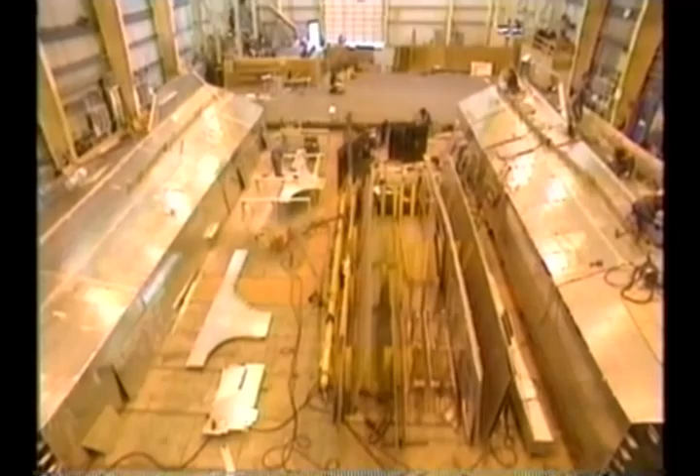This project is a very steep learning curve, but we expected that. The only way to gain experience is to do things, and we're fortunate that the government has allowed us this opportunity. We believe that we can go on from this and sell these things.

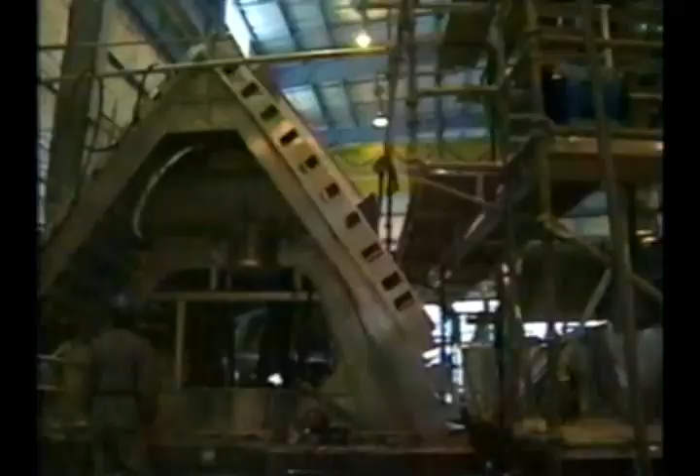As the months passed, management and crews moved over the hump of the learning curve. Like any multiple ship project, once you get the first ship under your belt, once you've banged your head and tripped over a few times, then the whole thing starts to run efficiently, and that's what we're seeing.

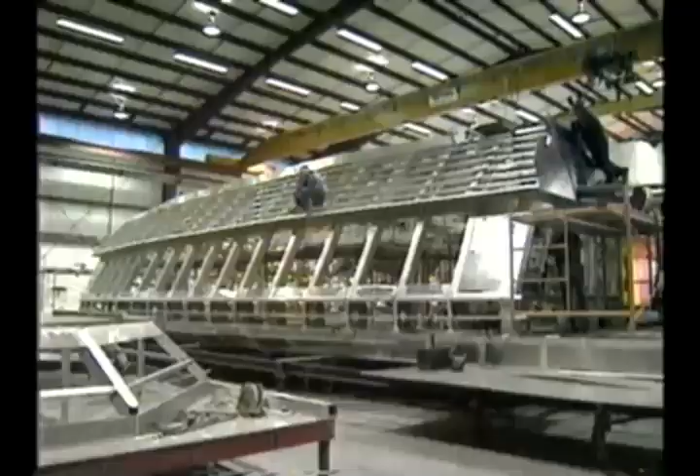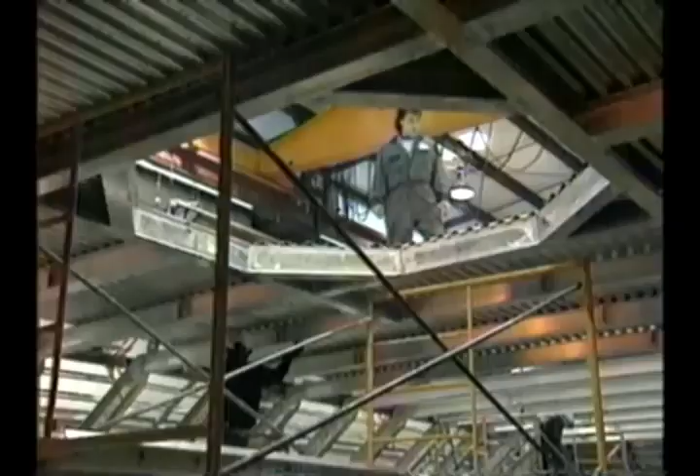Everyone involved began to get a sense of the potential this project could herald. At Point Hope Shipyard, the long term was starting to come into view. The learning curve has been better than we ever thought.

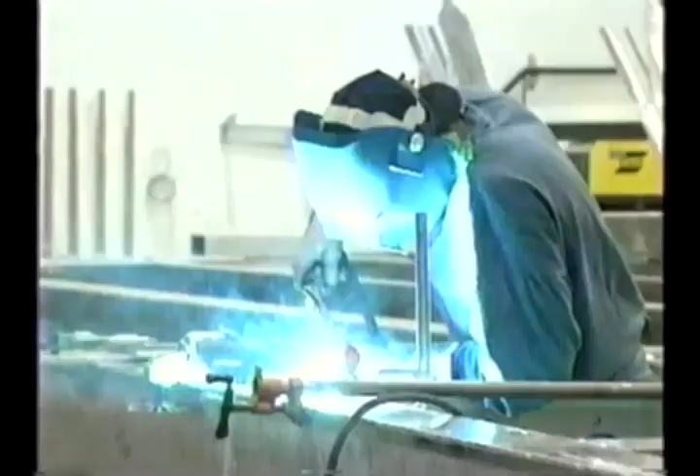The guys picked it up, I guess partly because they're seeing a future in shipbuilding now, which I don't think a lot of our workforce here has seen for some time. So I think with the great interest in it and seeing a future, they picked it up. The workforce seems to be genuinely interested, genuinely happy to come to work in the morning. Therefore, almost daily, the productivity is increasing. I see it as Point Hope's future.

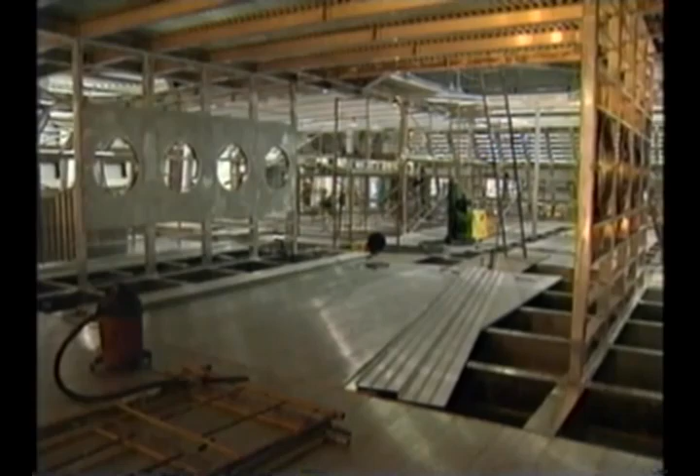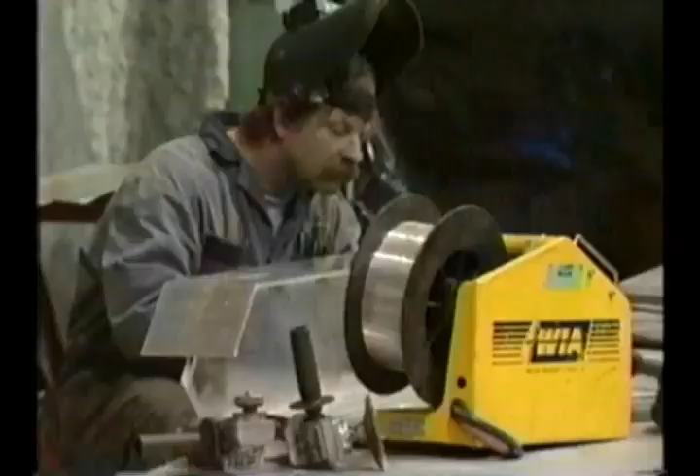Without this project, this company would not be here today. Fishermen are not getting their boats fixed, so there's been a slowdown. Even the Department of National Defence has had cutbacks, and they're not refitting their ships as often as they used to. At the moment, we're about 130, 130 all-year jobs. So the impact would be quite significant to the working base of Victoria.

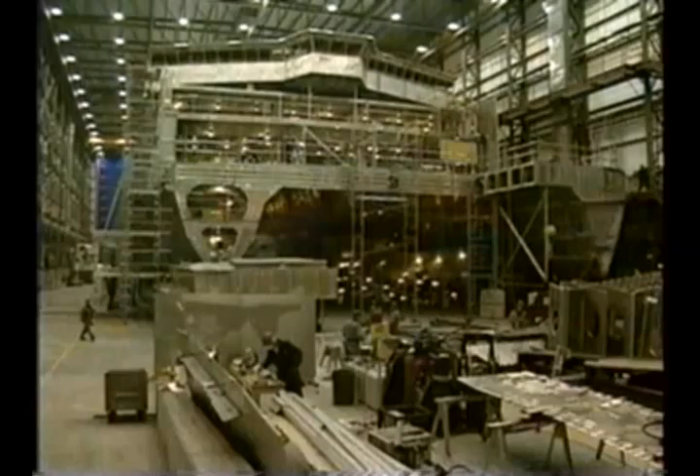At CFI, there is sober optimism, tempered by an acknowledgement that the project has had its detractors. It doesn't matter where you are in the world today, there's always someone telling you why you can't do it, and your ship will sink and you've made it out of the wrong material. But we all get past that.

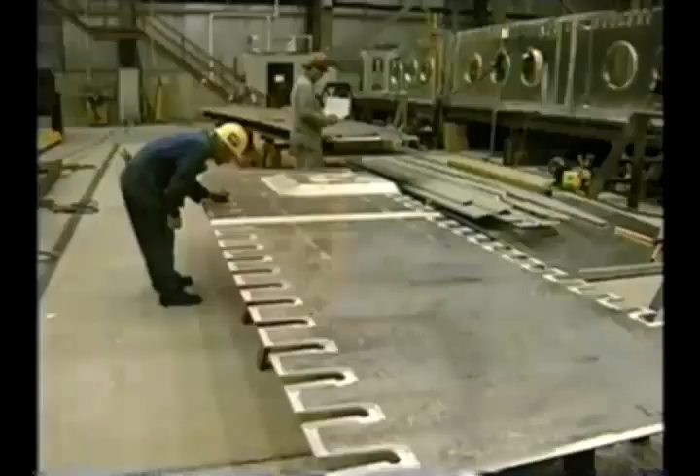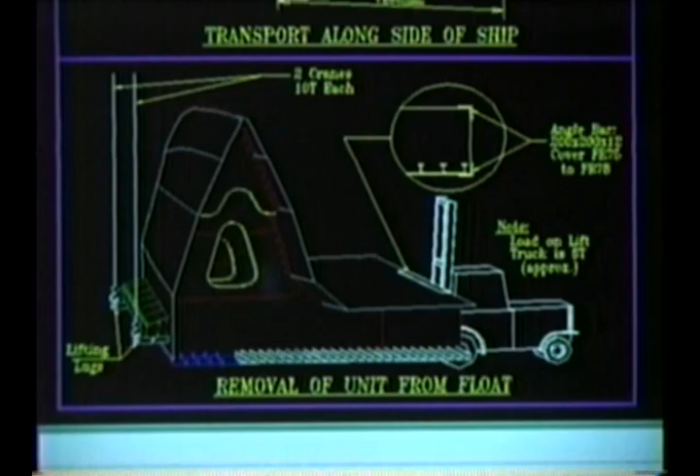For every phase of the PacifiCat's construction, a massive amount of design data had to be generated, coordinated, and effectively communicated. The job we do here is convert the structural drawings into drawings that are buildable.

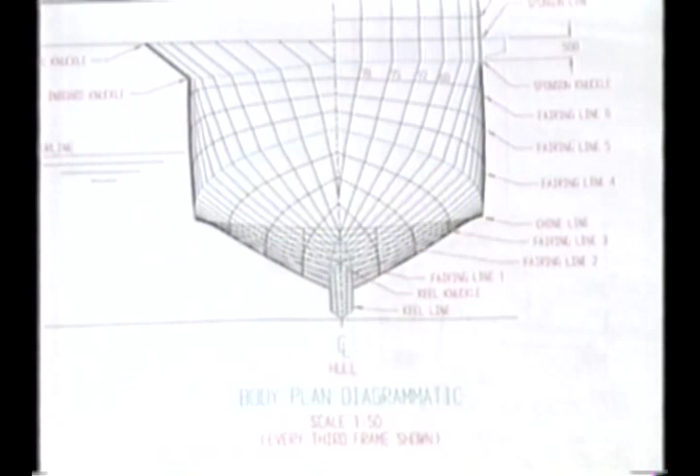So we take the information that comes from NCAD and convert that into geometry, which is cut down on the burning table, parts lists, data lists, which are also used for production, and to a certain amount make sure that the hull is buildable. It's similar to when you do sewing and you have a whole bunch of patterns and you try to get the most out of the material.

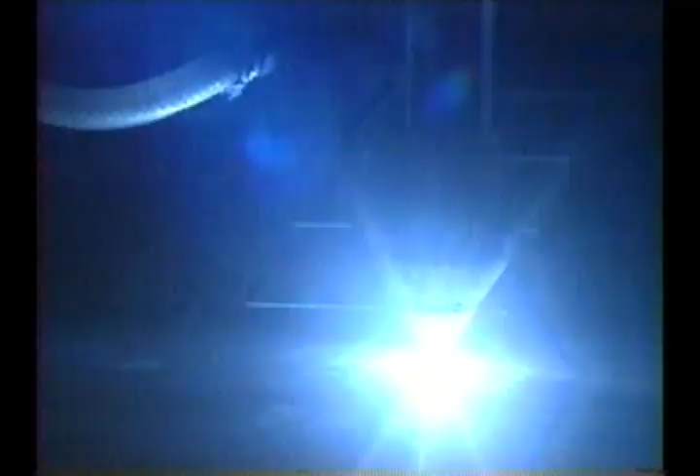Well, we do the same thing, except it's in aluminum. We know what our material size is, and we know what the geometry or the shape is, and then we try to nest that stuff in the plate to get the most utilization of it. And that's all done in AutoCAD, which is a computer-aided drafting program.

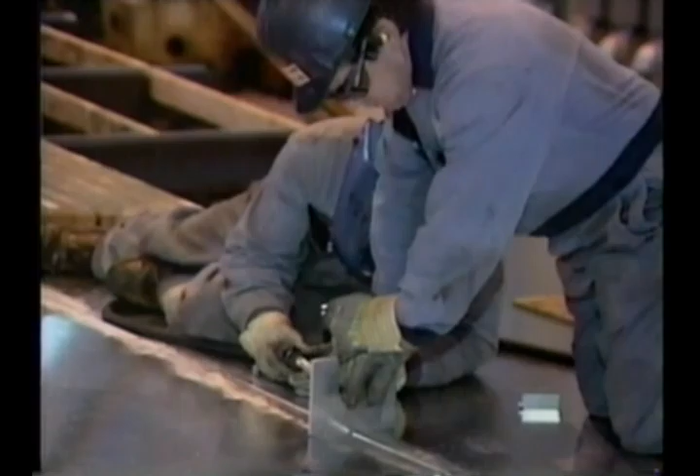Training programs were essential to equip workers with the unique skills the project would require. Each welder went through a 7-week training program, and at the end tested to the ISO welding code and also the CWB welding code. That, to me, has been a great part of why our quality level is where it is today.

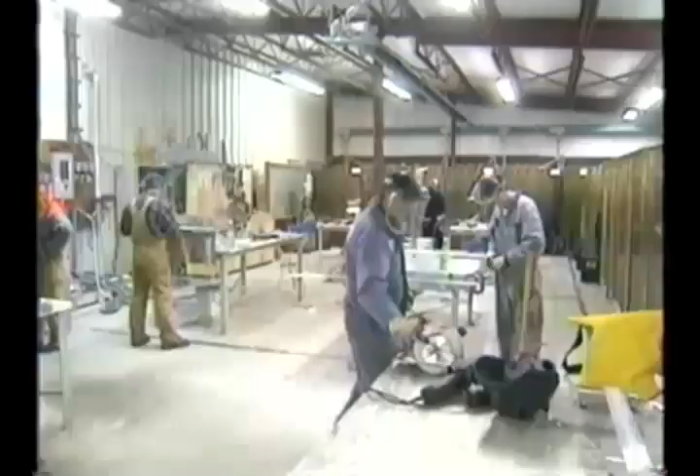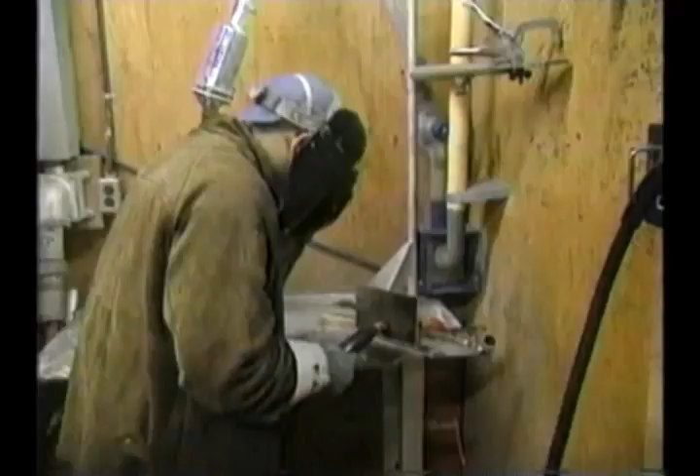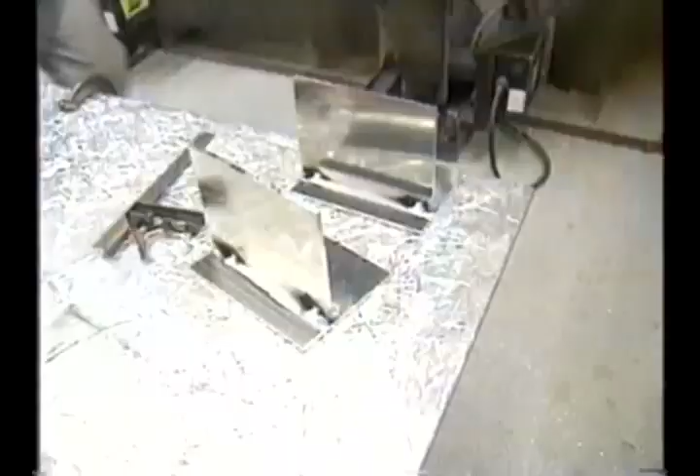CFI worked with the British Columbia Council of Marine Industries to develop a comprehensive aluminum welders training program, with courses offered at BCIT in Burnaby, Victoria's Camosun College, and North Island College in Port Alberni. With Australian and Finnish sources sharing information and experience in the building of high-speed aluminum vessels, the program has trained hundreds of welders to date. Most of the students came out of the shipyard originally.

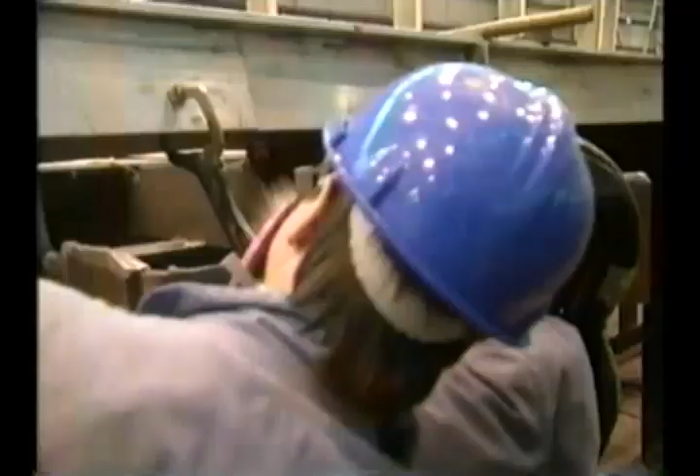They came through the union. More recently, we're starting to look for people out of the local colleges. It's meant a great deal of employment, new employment. We've run over 300 people through this facility, probably another 150 to 200 on the island.

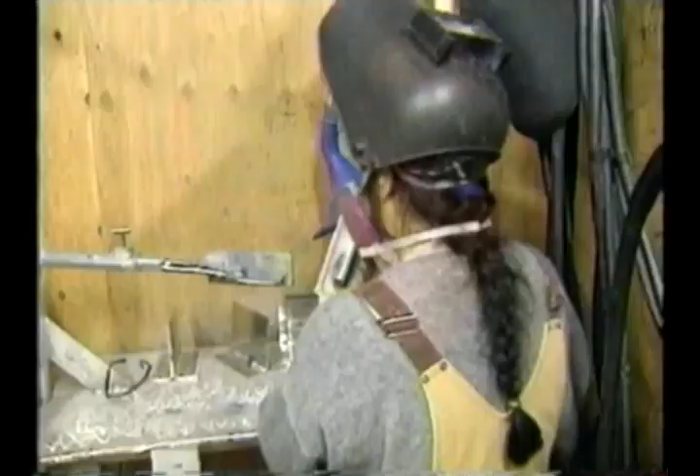When we were undertaking the training, we were closely involved with BCIT, and we were approached by their Department for Women in Trades. They came to us with a very good proposal for some funding for the women to be trained, and we took the opportunity, and it's worked out very well for us.

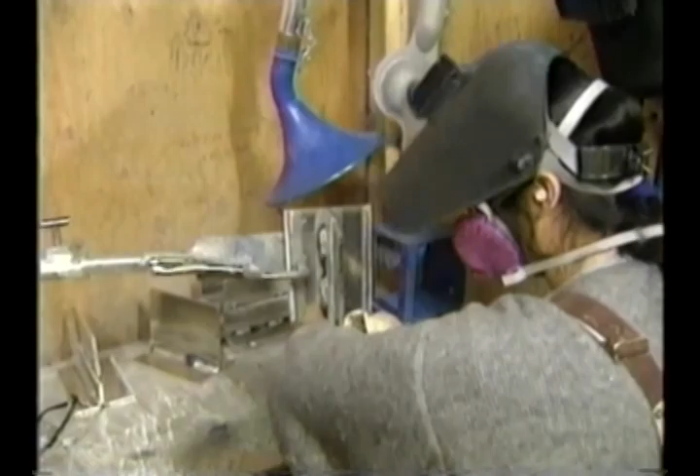In the trades, there's definitely a lot of opportunity to make some money. And I needed to do what I felt was the right thing by my child. I needed to provide a means of supporting her. And so I think, honestly, that was where it started.

I wanted something more physical. I didn't want to be in an office anymore. Just a lot of things I looked at, things that I had done, things that I didn't want to do anymore, and things I wanted to try.

Oh, it's hugely rewarding for me. When we went on a tour last week of the ship, I was just thrilled to see it all coming together and being so large and overwhelming, really, and being able to point out the little bits that I had done. It was quite exciting.

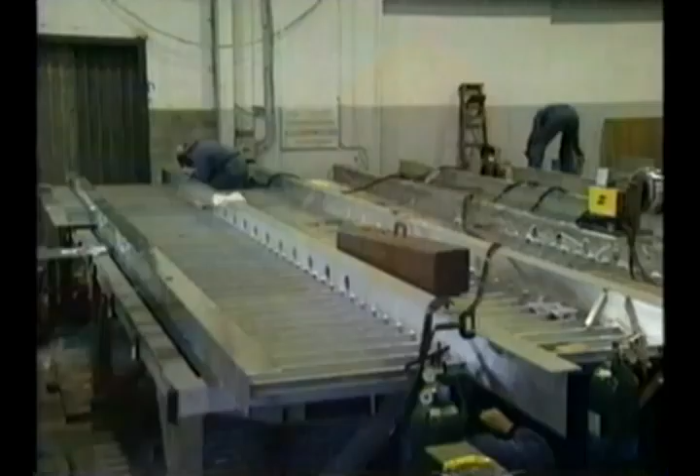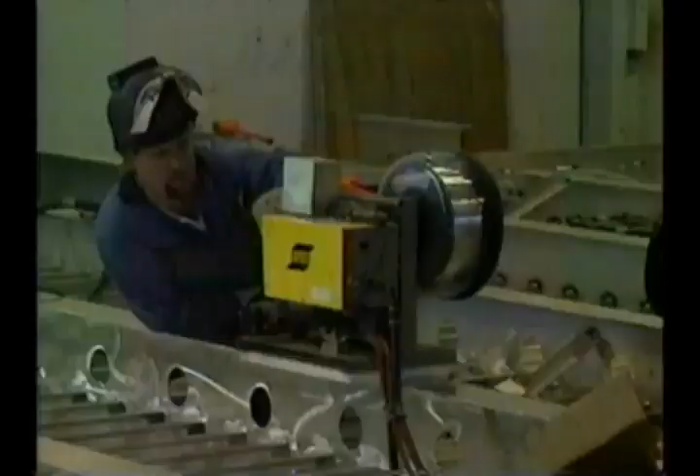At Alberni shipyards, the intensive training programs are paying off, equipping the company with the skills they will need to stay competitive. Each of the welders had to pass rigorous testing, not only practical but written, the theory of welding aluminum. We have 30 men here that have gone through a very rigorous course, and they're gainfully employed over the last year having done that.

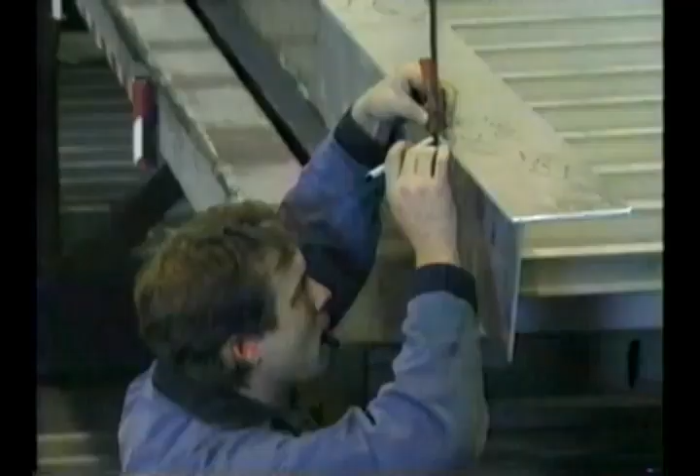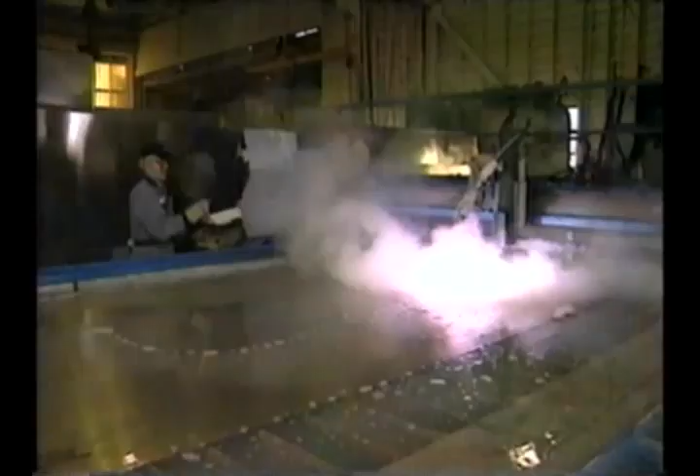We've had the benefit of doubling our manning. We have historically been a steel yard in construction and repair. We have had experience in aluminum, but obviously not to this scale before. The springboard opportunity with the benefit of acquiring or strengthening our aluminum skills is obvious and something that we will take advantage of in the future.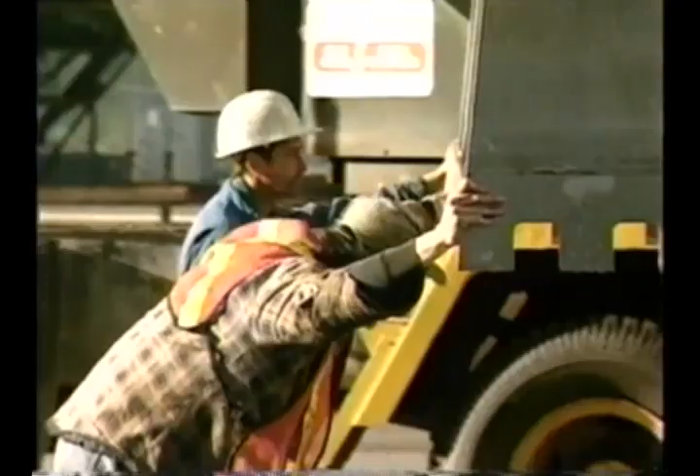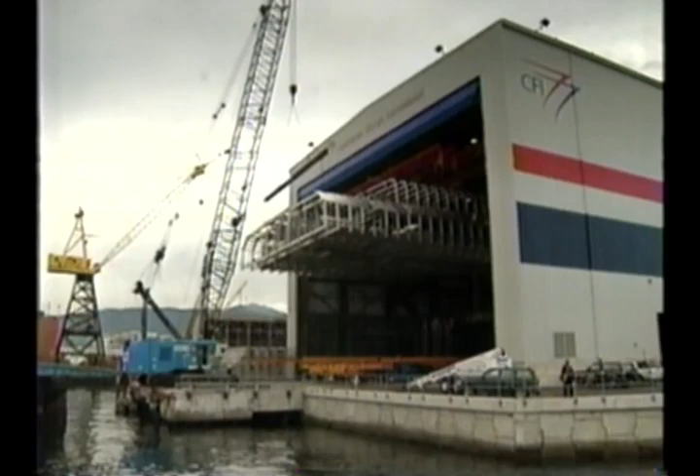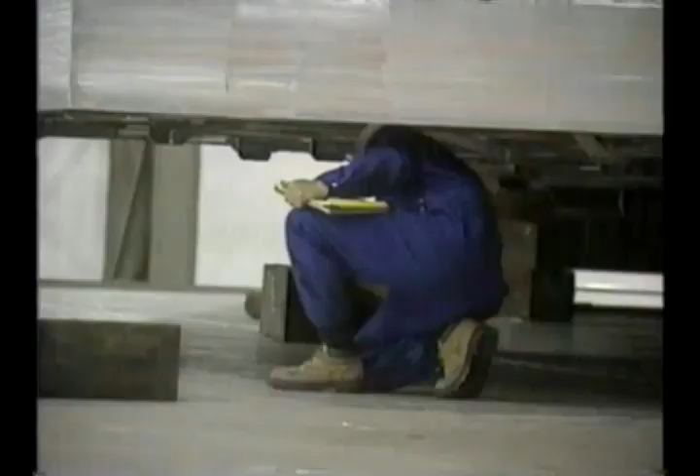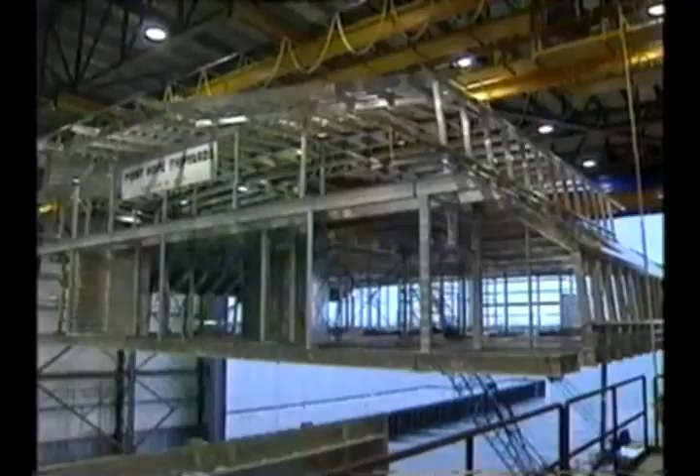In the end, every weld, every facet of construction must meet the code and quality standards of DNV, or Det Norske Veritas, the Scandinavian-based classification society that sets the premier building and safety standards for high-speed vessels. The classification society is akin to your city planning department. So it's a set of guidelines which the designer and the builder has to follow. It also gives you a huge degree of comfort knowing that these are the rules which are applicable, and if you build to these rules, then you're not going to have any problems with the design of the vessel.

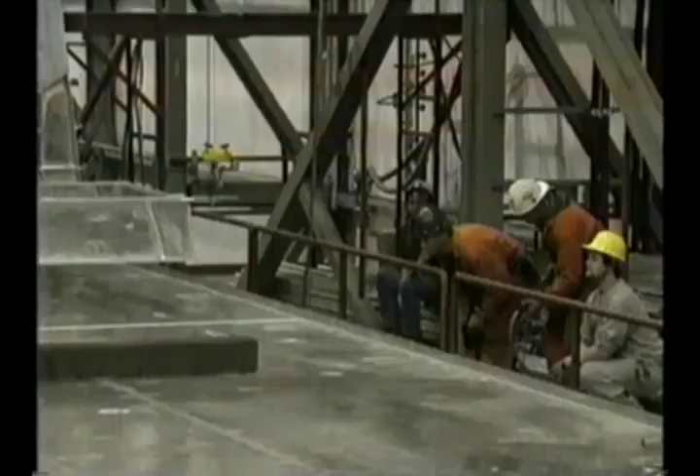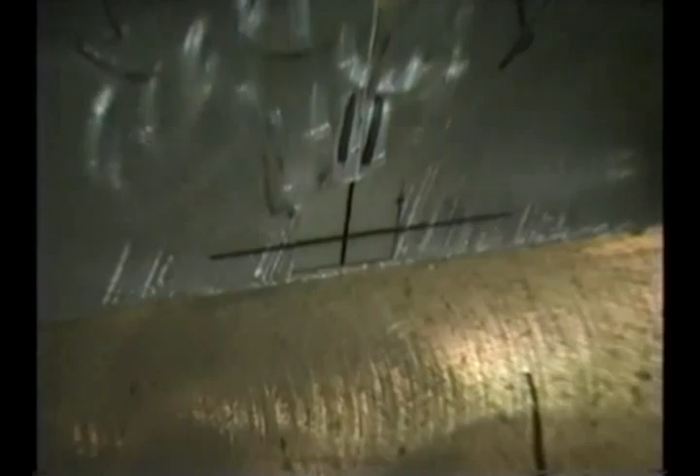PacifiCat's massive components pose unique challenges to engineers and builders intent on meeting DNV standards. The Leica alignment device works as a kind of high-tech surveyor's tool, generating a perfect 3D virtual grid inside the shed, along which the actual vessel is aligned.

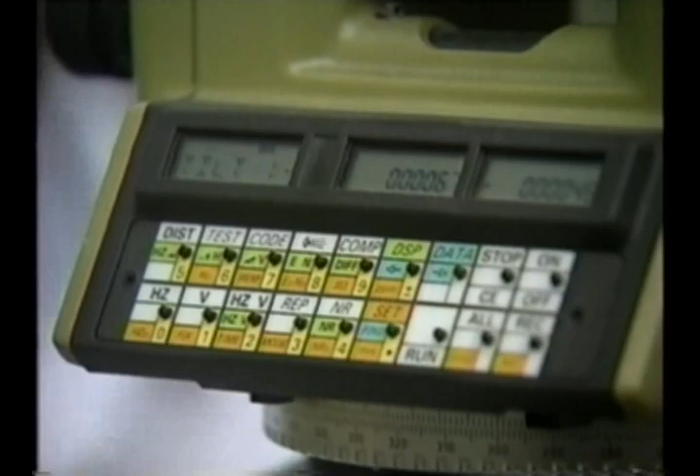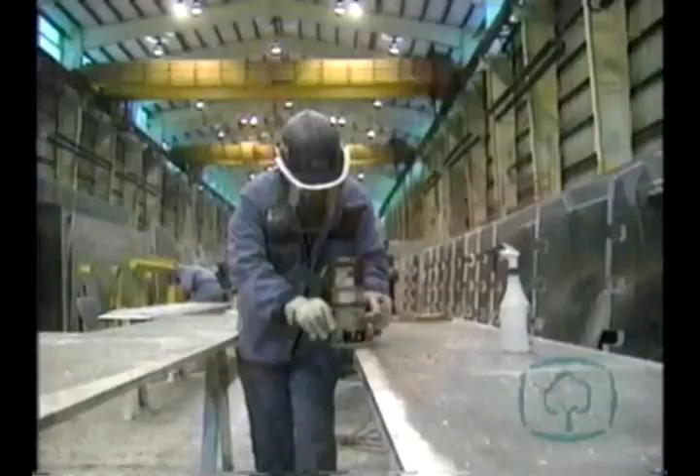In some ways, the project is more akin to the aerospace industry than to traditional shipbuilding in terms of the precision required and the technologies employed. The big difference with aluminum is the requirement for the weight to be controlled so precisely that components are lighter. It's more like a wristwatch compared to a grandfather clock. The precision has to be there, but the parts are smaller and just more difficult to work with.

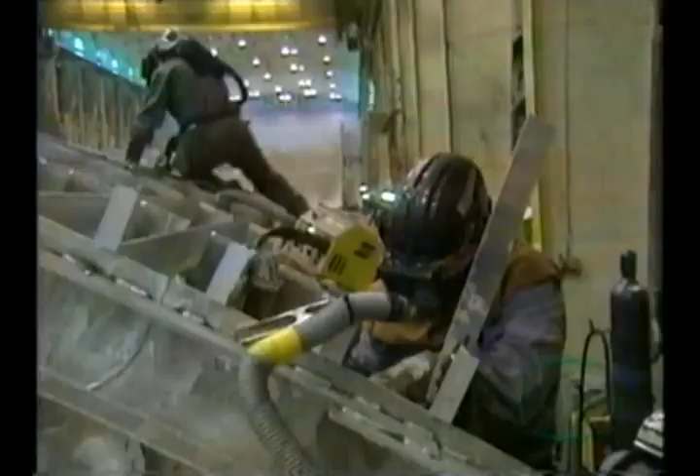Our techniques for alignment of various structural members have improved tremendously. The actual knowledge and competence of our welders is increasing steadily and constantly. We anticipate seeing improvement all the way through the third ship, let alone the first and second.